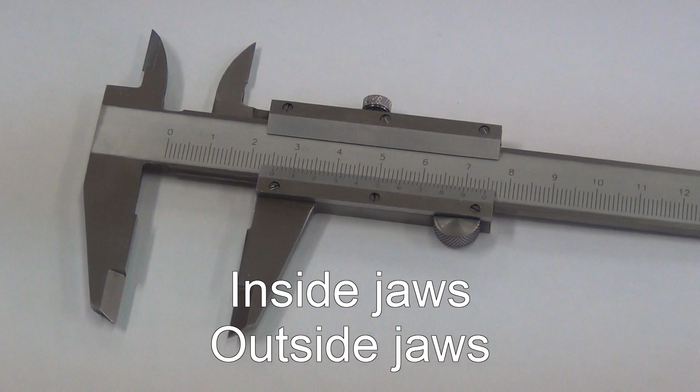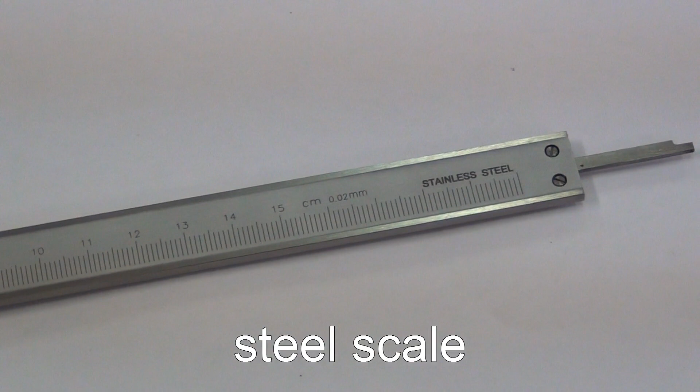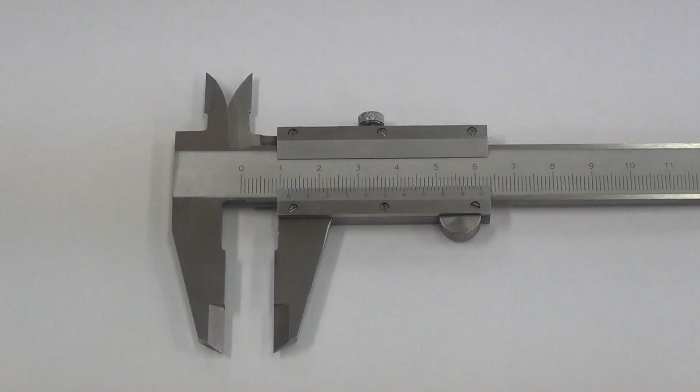The vernier calipers consists of inside jaws situated at the top and outside jaws situated at the bottom. It has a vernier scale that slides over a steel scale, and an extension rod at the rear for depth measure. The steel scale divides 1 centimeter into 10 parts, and the vernier scale divides 1 millimeter into 50 parts.

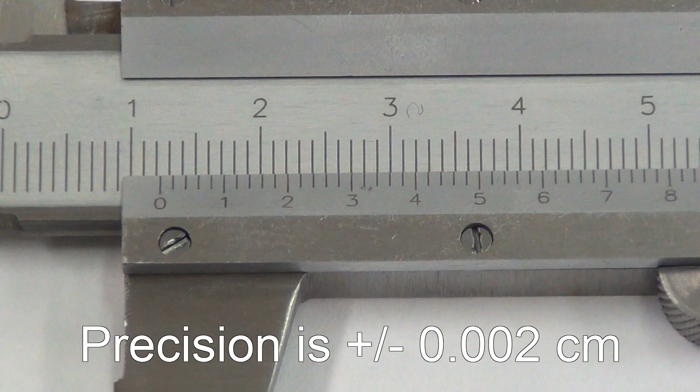We always look for a line that aligns itself with the steel scale. The precision is 0.002 centimeter.

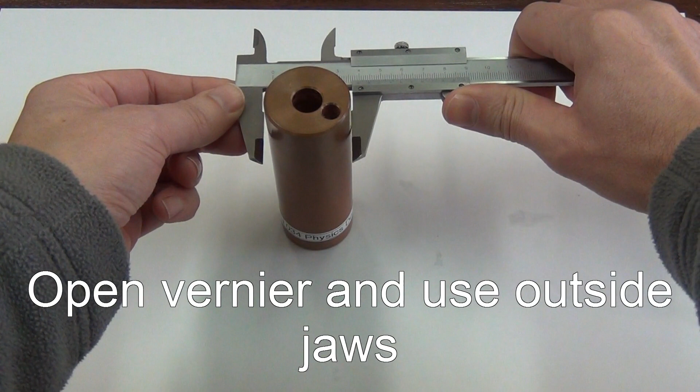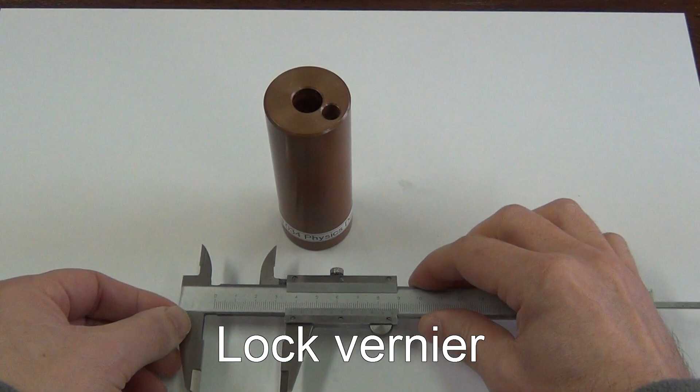We start this demonstration by measuring an external diameter. For this measurement, we require the use of the outside jaws. We open the vernier and then we enclose the cylinder between these two outside jaws. We lock the vernier and prepare to read the measurement.

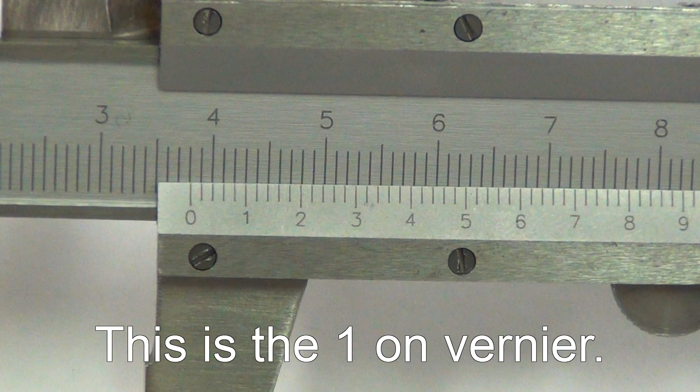We start first by reading the value on the steel scale. It is the value on the left hand side of the 0 mark on the vernier, and this is 3.8 centimeters. Then we look for the aligned marks and compose the measurement. This is the number 1. So the reading is 3.810 centimeters.

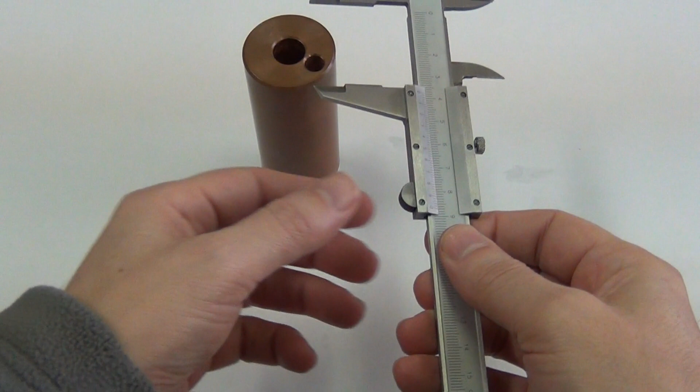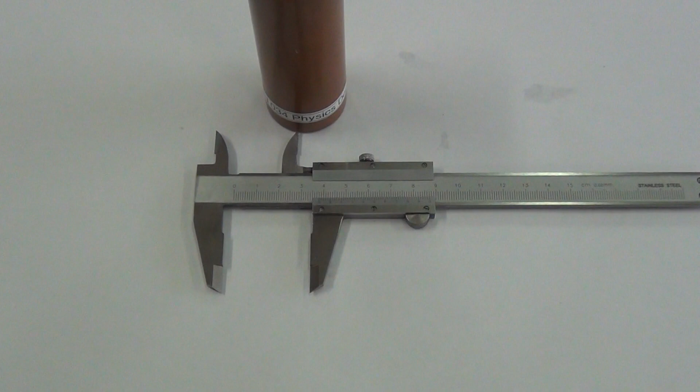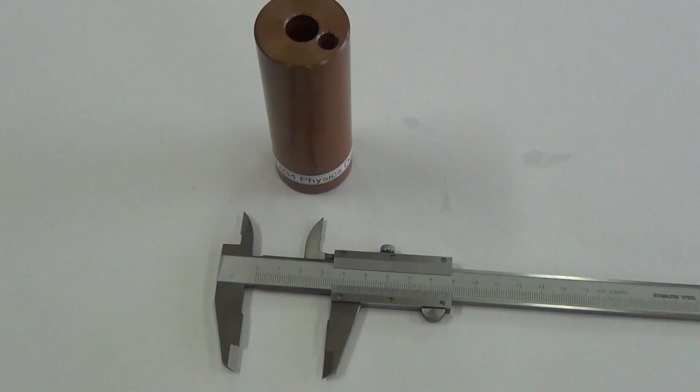We repeat the measurement by opening the jaws and locating in a position perpendicular to the previous reading. We lock the vernier to prevent changing the reading and prepare to read the measurement. We start with the value on the steel scale, and this is 3.8 centimeters. Then we look for the aligned marks and we get a reading of 3.802 centimeters. We find an average and it is 3.806 centimeters.

Now we measure the internal diameter of a bore. We use the inside jaws and place it inside the internal diameter. We open the jaws, lock the vernier and prepare to read.

We first read the number to the left hand side of the 0 mark, which is 1.2, and then we go for the aligned marks. The reading is 1.262.

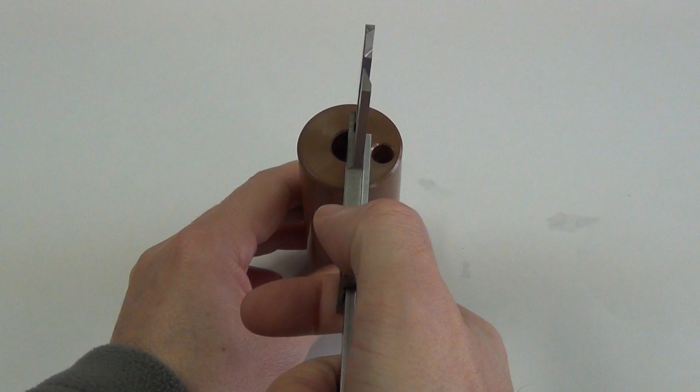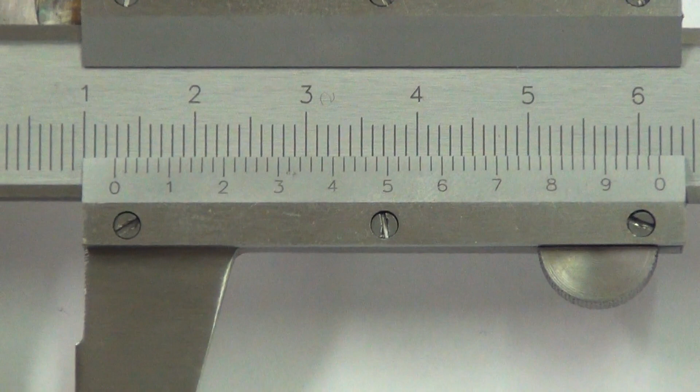We repeat the reading by taking a measurement perpendicular to the previous one. We use the inside jaws, we open them up inside the bore, we lock the vernier and read again. We have 1.2 on the steel scale, and then the aligned marks give us a reading of 0.062, so the reading is 1.262 centimeters. The average internal diameter is 1.262.

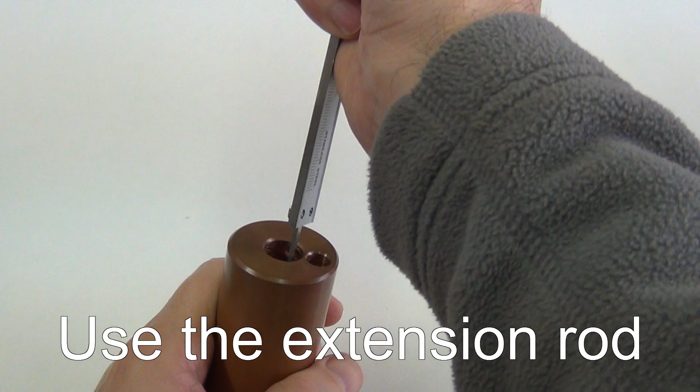Now we measure the depth of the bore. For this measurement, we require the protruding rod at the very back of the vernier. We insert the rod and extend it fully to the bottom by opening the jaws. We take it out, lock the vernier, and prepare to read as before.

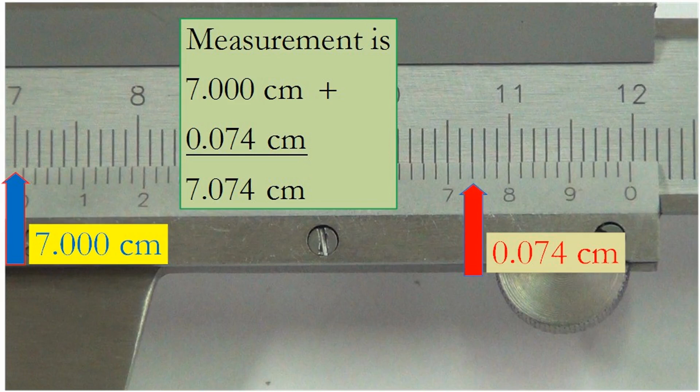We first read the value on the steel scale, which is the value to the left hand side of the 0, and this reads 7.0. And then we go for the aligned mark, 0.074, so the reading is 7.074 centimeters.

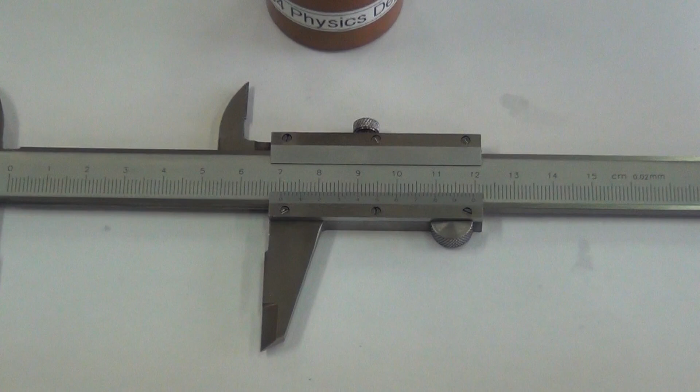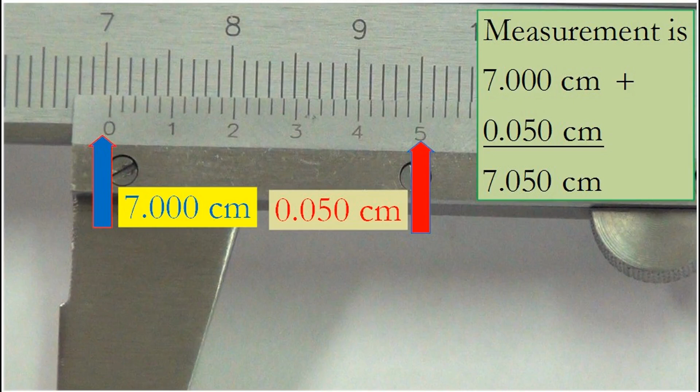We repeat the measurement by inserting the extension rod again. Open the jaws until the rod reaches the bottom, and we read as before. We see 7.0 centimeters on the steel scale, an aligned mark of 0.050, so 7.050 centimeters is the measurement. Average value 7.062 centimeters.

We now repeat the same measurements using a digital vernier calipers. As we can see, there is a digital display on this vernier, and so readings are quite easy and straightforward. We use the outside jaws to measure the external diameter of the copper cylinder, and we read directly 38.13 millimeters.

We close the vernier and reset the reading and repeat the measurement by choosing a perpendicular location to the previous one. And here we read 38.05 millimeters. Average diameter is 38.09 millimeters.

Now we go for the internal diameter using the internal jaws. We open them up inside the bore, and here we read a 12 millimeter diameter.

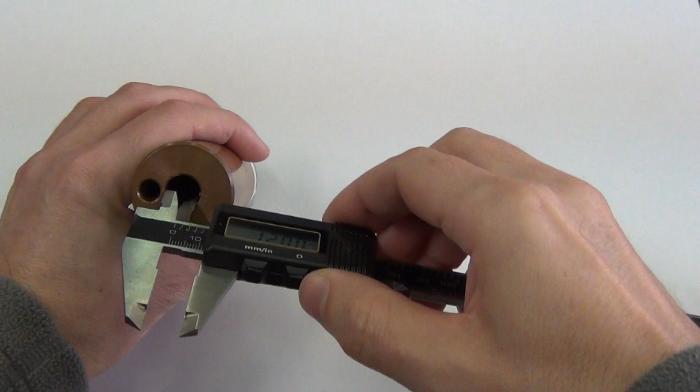We repeat as usual, choosing a location perpendicular to the previous measurement, and here it is 12.59 millimeters. The average internal diameter is 12.29 millimeters.

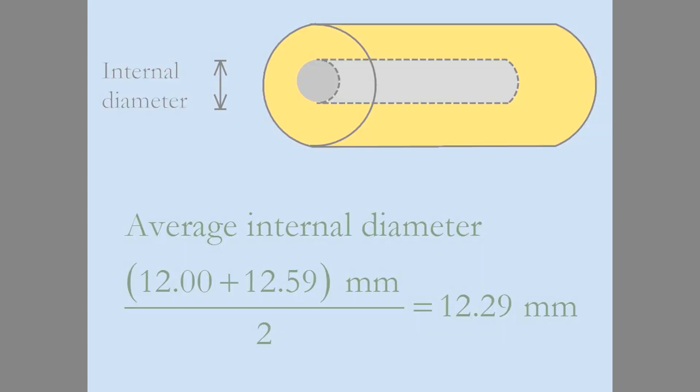We lastly go for the depth measure using an extension rod. We open it up inside until it touches the bottom, and here we read 69.83 millimeters.

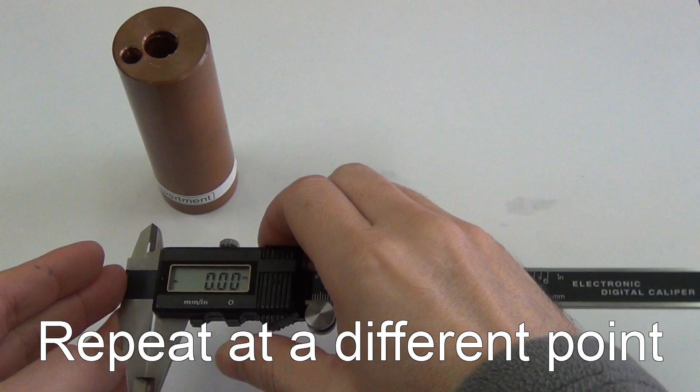We repeat the measurement at a different point. And here it reads 70.02 millimeters. The average depth is 69.92 millimeters.